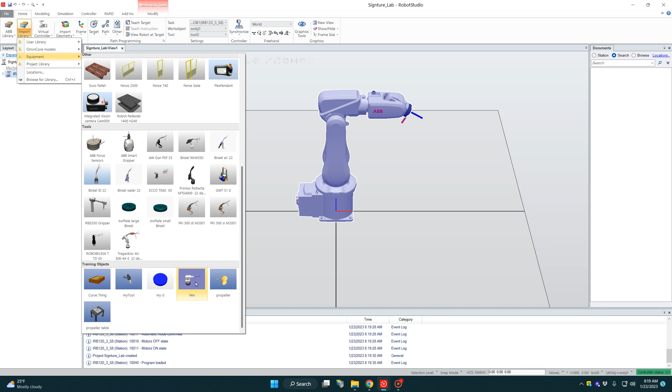We'll select that. Now we want to attach the pen to the robot by dragging the pen onto the robot and clicking Yes. Now earlier I created a piece of paper using the Modeling tab, a solid surface, and I placed it onto the station, and then I saved it as a library.

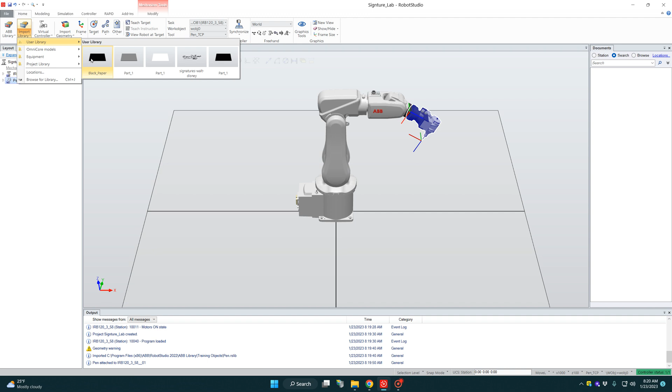So we're going to grab that under User Library, a black piece of paper, and I chose black so I could see the tracing of the signature when I went to do the targets. So we'll place the paper onto the station, and we want to create a work object using that paper. And to do that, we're going to come up here to Other and Create Work Object.

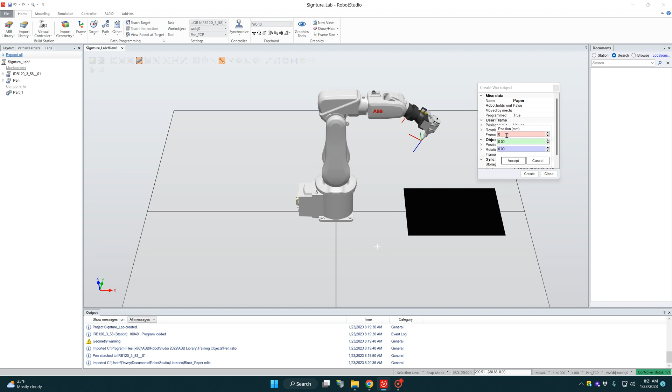Now we want to establish the parameters for this work object, and we'll start out by giving it a name, and that'll be paper. And then we want to mark the coordinates, and to do that we'll come up here to the snap tool, and then we'll just click anywhere in the box, and we want to mark the coordinates of the top left portion of the paper.

And as you can see, when the dot pops up, just click and it takes those coordinates and fills them in automatically. Now we want to orient the work object to match the orientation of the pen, and those coordinates are for the z-axis 180 degrees and for the x-axis 180 degrees. And click Accept, and then you'll hit Create. And now you can see the orientation of the work object matches the orientation of the pen. And then we want to be sure to turn off the snap.

The next thing I did was I went online and picked a signature image in a JPEG, and then I used AutoCAD, or you can use an online converter, to convert that to a drawing object. That would be a file ending in DWG, or RobotStudio also accepts STL files, object files, DXF files.

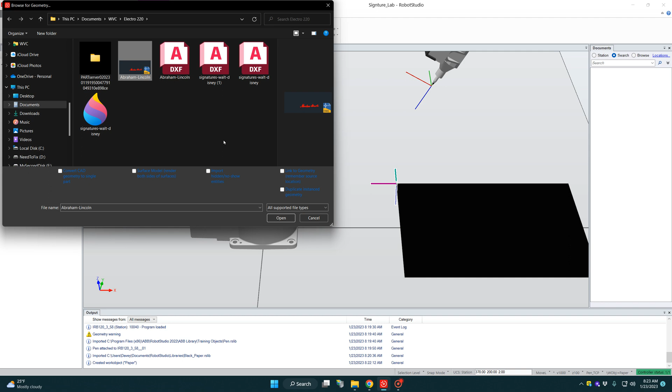And so I'll grab my signature and load it into the station. Again, that was up here in Geometry, and browse for Geometry. The first thing I want to do is scale it, because it's a little bigger than I wanted. So I'm going to right click on the signature and come down to Modify and select Scale. And I determined earlier that a 0.5 worked out just fine. So we'll select Apply and close that window.

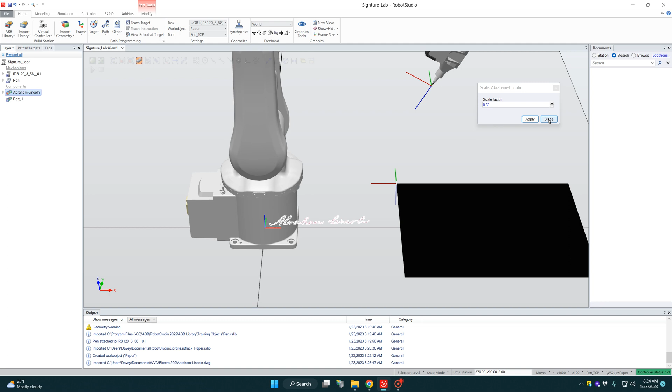Now the next thing we want to do is align the signature onto our paper. So again, we'll right click on the signature and select Position and Set Position. And again, earlier I determined a position that was 400 on the x-axis. Now we want it a little bit above the paper because right now it's actually on the surface. The paper is 2 millimeters thick, so we want to lift it up to 3 millimeters so the signature is above the paper. And we'll click Apply, and then we'll close that window.

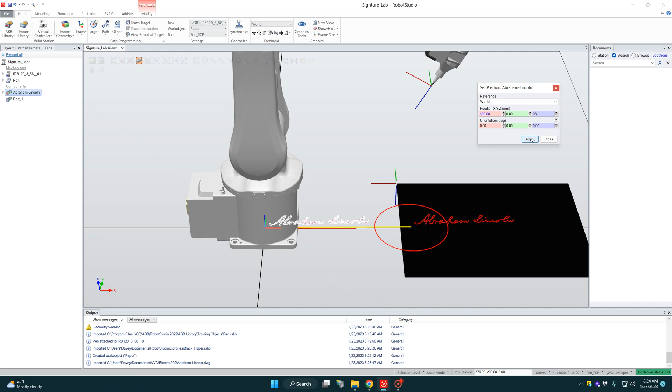Now the next part's the fun part. We're going to trace this signature, and to do that we're going to start out by setting the target settings down here on the bottom of the screen. We want move joint. We want our velocity to be 100. We want our zone to be zone 10. We want to make sure our tool is the pen and our work object is the paper.

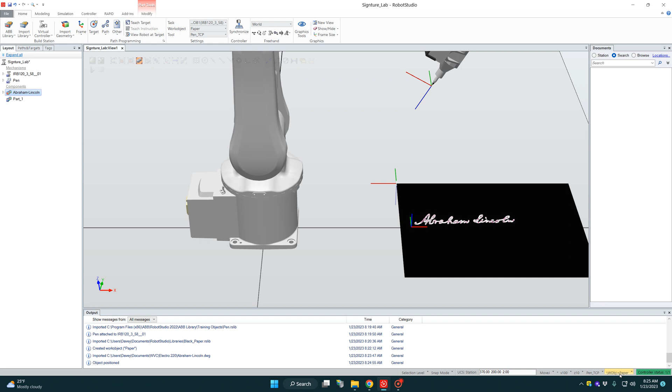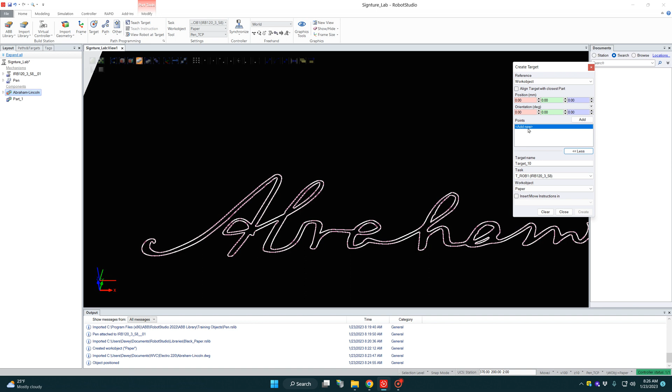Then we're going to zoom in to the signature, and you can see it's well defined here. And we're going to start out by coming up here to target, and we're going to click on that, and we're going to create a bunch of targets. We'll select our work object as a reference. If this menu isn't open, we want to open this, verify that it's paper, and then we'll click here to add new target. And we just come over to our starting point and we'll click each point that we want the robot to go to.

And basically we just continue outlining the signature one at a time. As you can see, each time we click it adds a point. Now when you come to a straightaway, you actually just scoot on up for as long as it's a straight line, and then we'll come down around this loop again. Here's another straightaway, so we'll come down to here and here.

Now one thing I noticed about this signature is that Abraham Lincoln did his A by coming up and down and around. He actually lifted his pen, came over to here, and started his signature again. So what we're going to do is we're going to create an extra target right here at the end, and that will be point 44, and we want to lift it above. We want to lift the pen above the paper, and we'll do that by adding minus 20 millimeters,

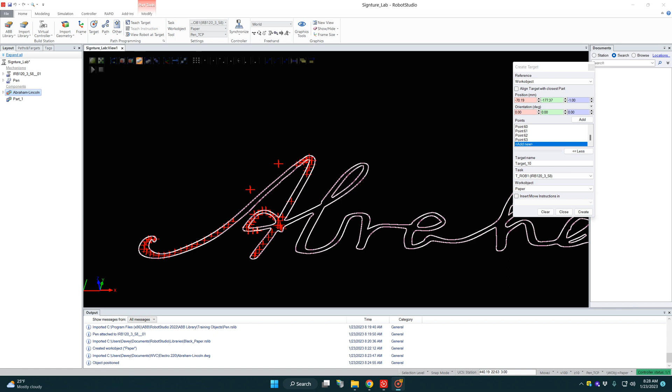Now I'm going to go ahead and mark all these points while I pause the video, and I'll be right back. Now if along the way you make a mistake, all you have to do is come up and delete the point. I'm going to back up here just a little, and then just come back and continue with an add new.

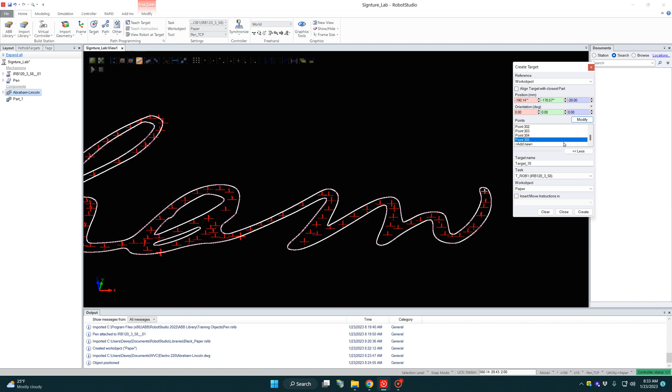And as we finish the first name, we'll see it comes to an end where we actually want to stop writing on the paper. So again, we're going to create an extra target, and then we're going to modify it, and we're going to lift it. And your measurement for the z-axis will be a negative number. We'll click modify, and you can see it puts the point up high.

And then we're going to come over here to the last name, and where the signature starts again, we'll click a point. Then we're going to modify that and also put that above the paper. And then we'll continue the signature. And again, I'll pause the video. I'll be right back.

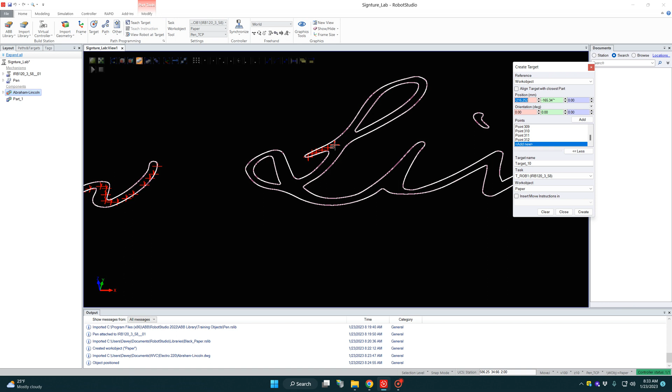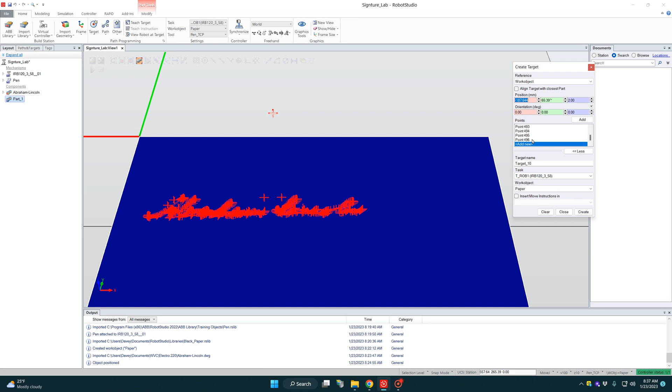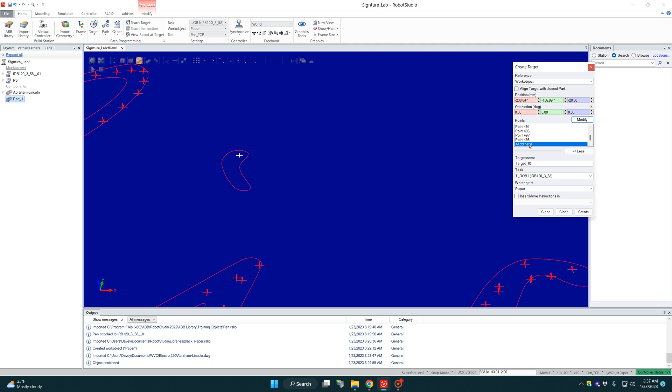Alright, so we've traced the entire signature, except we want to dot the I. So we're going to do the same procedure here. We're going to add a target, going to modify it, and we'll lift it above the paper. And we'll come over here to the I. We'll add a target. Lift it above the paper. And then continue. And that should do it. Alright.

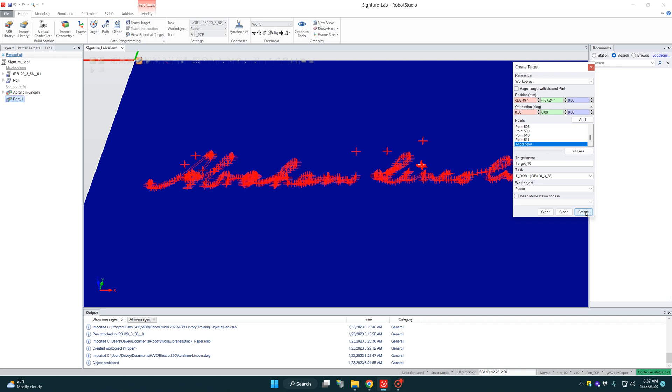So once you have your signature all traced out, you simply hit create. And then you can close that window. And this is all the traces. It's kind of hard to read. Those are all the various targets, actually. Now, to make it clear to see, we're going to come here to the left, and you'll see all the targets are under the work object paper.

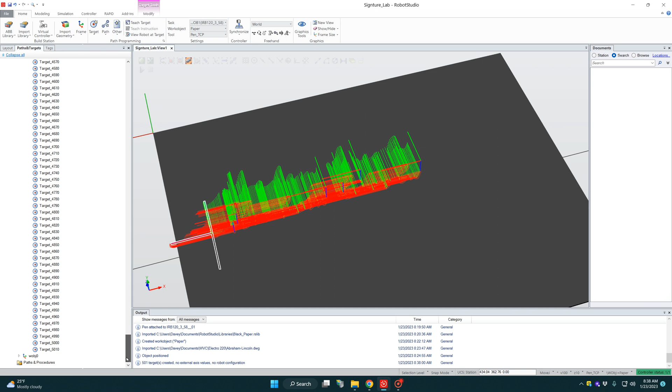I'm going to highlight the first one, come down to the bottom, hold down the shift key, select the bottom one, and then right click in view, and we're going to turn off visible. So that hides the targets from the station area, from the paper, so we can still see the signature.

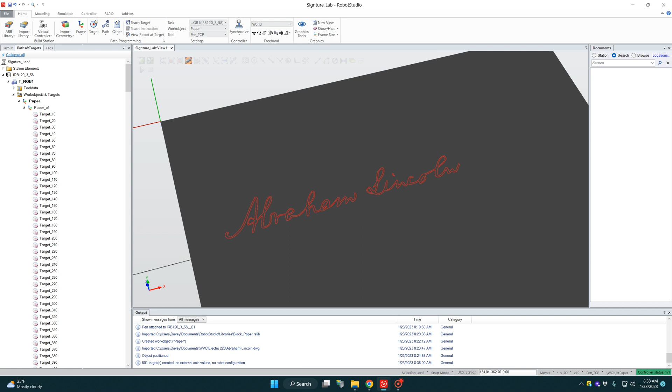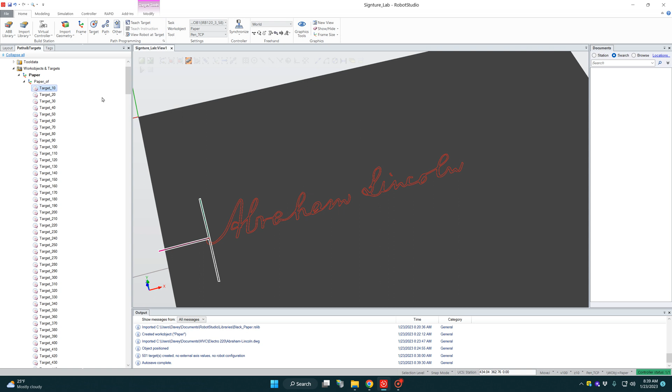Now the next step will be to create a path, and to do that we want to verify our settings down here at the bottom. Again, MoveJ, velocity 100, zone 10. We've got the pen and the work object as a paper. We're going to click the first target, scroll down to the bottom, hold down your shift key, and click the last target. Then we're going to right click, and we're going to add to new path.

That takes all your targets. We'll close the targets level, and we'll open up the path, and it puts all your targets in a path. The first step is to rename that path to main, so it puts it in a proper place in the rapid. And then we're just going to scroll through and verify. So there are all the targets.

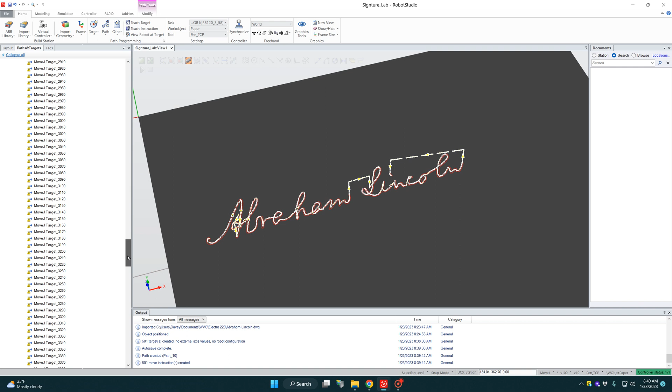Now we want to start the robot from a home position, which is fine right there. So we're going to change our work object to work object 0, and with the robot in that position, we're going to teach target. And we'll come over here to work object, and that's the target that we just defined. So we'll rename that to home.

Now we want to take that and drag it down to our path, and then that puts it down at the very bottom. And then we're going to drag it again, but we're going to drag it into here, and we're going to reorganize these so home's on the top.

Now the speed from home to target, we want to be a little faster. So the first target, we're going to right click, and we're going to modify the speed to be velocity of 1000. And then we're going to come down to the bottom, and we want to modify the bottom home to a speed of 1000.

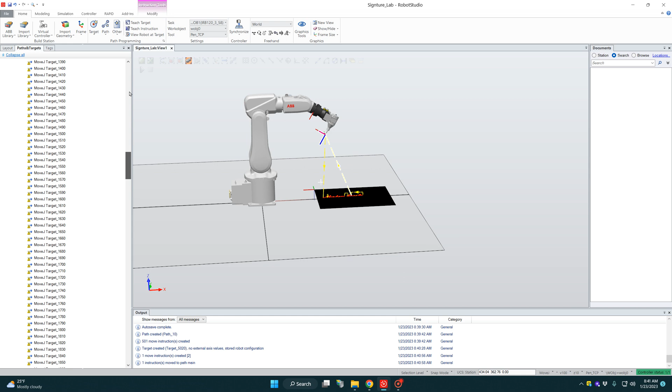Now we want to verify that the tracing is going to work. So we're going to right click on main and move along path and verify. Now, as you can see, the robot went into an unusual position, and that is common, I find. And the fix for that is to select

right click on main path and come down here to auto configuration, and we want to select linear circular move instructions. Just click on that and you can see it fixes the problem. So we'll do that again. We'll run a move along path, and there we go.

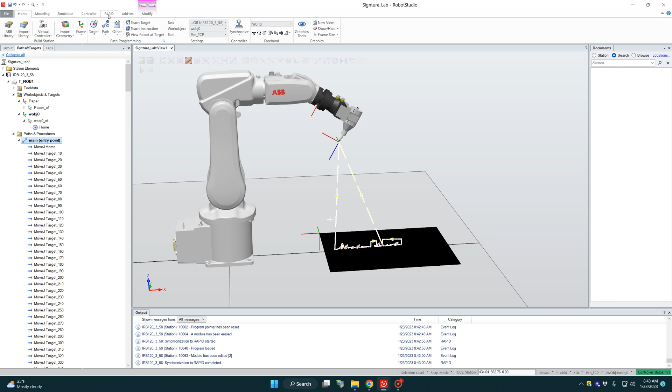Lastly, we'll synchronize to the rapid. I'll come up here to rapid, expand these levels, double click on main, and just verify. So here's all our targets, and here's our path. Again, the first procedure is main. We can delete this line.

There's all our paths. Now, since we deleted that line, we want to synchronize the rapid back to the station. So click on synchronize, the drop down synchronize, and select synchronize to station. And then we're going to just run a simulation. We'll hit play right here and watch our robot.

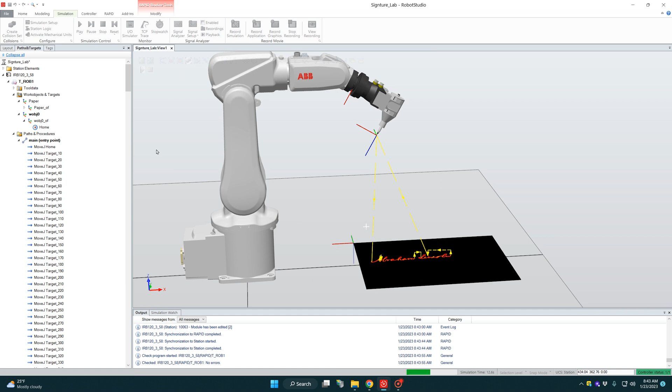So you can see here it comes up, it jumps over and comes back down. And there's our project. Lastly, we're going to come over here to Rapid. We're going to save the program as. I'll navigate to the USB drive, and I'll create a folder name. Signature_Lincoln, and save. I'll come back to home and I'll click the little floppy disk to save my project.

And then let's test it in the flex pendant. So I'll open up the flex pendant. I'll click on load program, and I'll navigate to the USB where I find Signature Lincoln. There's our program file. Click OK.

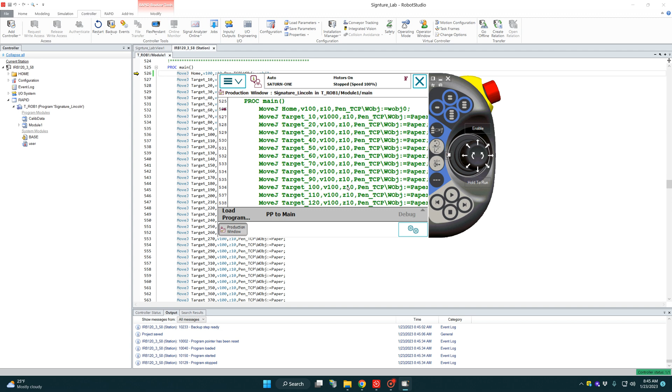There's our program. I'm going to close out the Rapid and move this out of the way and click on play. And there's our project, Abraham Lincoln.